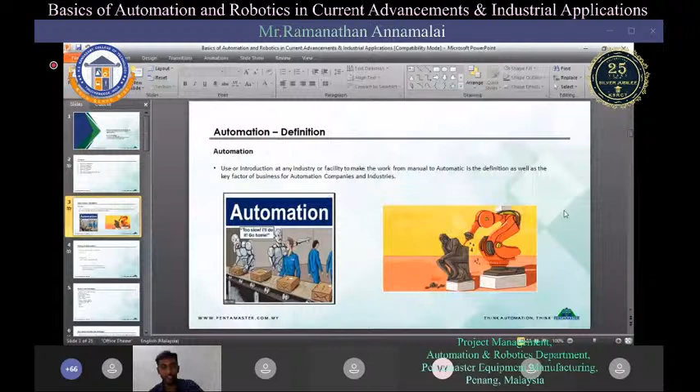It will be interesting because the first ever automated invention was a clock. Previously, in medieval times, we used shadows to determine the time, and the first ever equipment made was actually a clock. It was followed by different inventions like windmills, steam engines, etc. Currently, in this generation, it's very much advanced and used to test sensors, microchips, and also assembly of servers, etc.

So in that line, our company is making solutions - every automated solution that a consignee or customer requires us to do.

So in this session we'll be going through detail, step by step. Any doubt, you can note down and ask me at the end of the session, I'll be free to answer any of your questions. One more thing I'd like to emphasize is that our company is specialized in automation, and robotics is just a tool we are using.

My job view and job scope is something like I need to manage the engineers, so more of the technical data I might be lacking somewhere, but I'll give my best on whatever I know. If there's something you ask that I don't have the answer to currently, I will surely get advice from my engineer and get back to you.

And I think, so let's go to the next slide. For automation basics and principles, I've listed down everything from the start, and the process we'll be doing to build a machine. This is the second half of the process - the first half is something like you will receive documentation and everything, which I think will not interest you much.

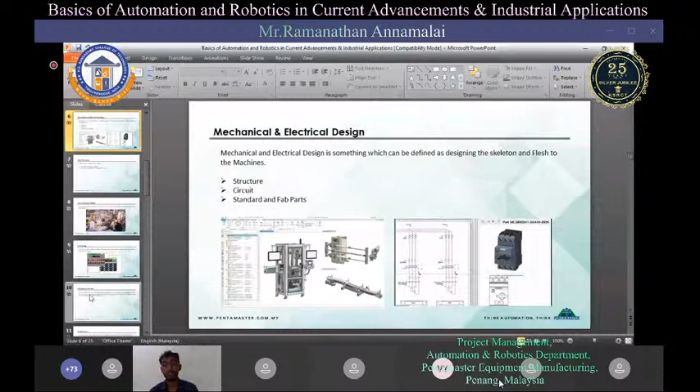Once they finish their mechanical design, they will move to the parts purchase. In our machine or solution, we need to use various amounts of parts - hundreds and thousands of parts we need to use. There are standard parts and fabrication parts.

Standard parts are long lead items which are already available in the market, like the robots and automation equipment used in the machine. Fabrication parts are something where we need to release a drawing and then a vendor would do it for you - you release a drawing and they will make the parts for you. This one you can receive in very little time. The standard parts which are already in the market will take more time to reach you, since they are long lead items.

Once you finish your design, you send your package to the customer, and the consignee will make sure that everything is satisfied, every condition is satisfied, and then they will give approval to proceed with the parts purchase. So next step - I think you're following up with me.

The first step is the mechanical design and the electrical design for the circuit, and then you go into parts purchase. After the parts purchase, we will start the assembly and wiring. Once you receive all the parts, you will start to assemble the structures and also the parts of the machine which is required to be done.

This will take around 3 to 4 weeks to assemble the machine and do the wiring and equipment, because each and every part will be communicated through I/O systems. I/O is input and output - I give you a signal and then you acknowledge back. This is the principle we use in automation machines to communicate between different parts.

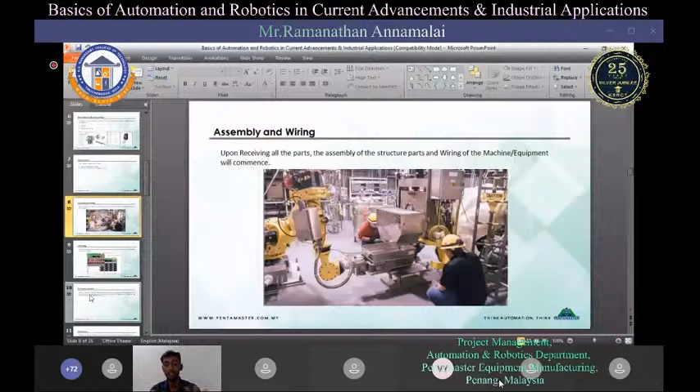Then the next step, you go to the I/O testing - that's input and output, as I said. Normally what we do, we have a system called PLC. The communication is such that all the mechanical and electrical parts will communicate to the PLC and then modify or execute the command that you are giving. So this I/O will be controlled by a PLC system, which I think in Mechatronics you also have a paper on PLC programming, if I'm not wrong.

So this PLC programming is like a code, and you will go through each and every step. You will write the code on how the machine should move and what exactly it should do. After writing the code, you will test the communication between the parts and the IO, checking whether you are receiving everything you need or not.

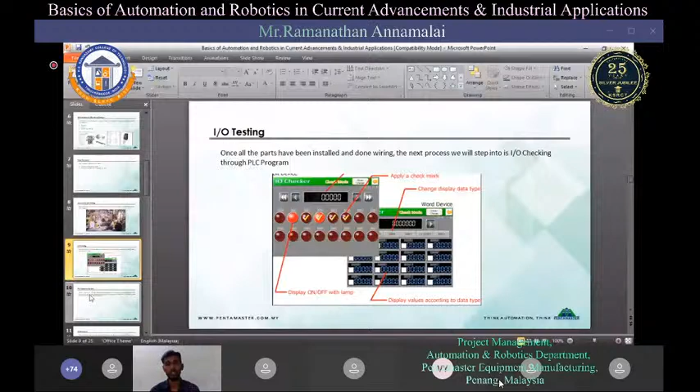After doing this IO testing, you will move to the dry run. Once you get all the communication of the machines and the values for whatever steps are required, to make sure your PLC is working correctly, you will run through a dry run. This means you will just let the machine run.

This dry run is to make sure the hydraulics and pneumatics of the machine are working properly. One basic thing about this machine is that whatever machine we are building is completely based on satisfying the customer's requirement for their product. Sometimes a customer might need us to assemble a product on a conveyor, or they might require us to test their product to make sure it's okay.

For example, if you have your phone, there are a lot of microchips inside it, but you don't know whether a chip is faulty or working correctly. That's where we come into action and make sure that this part is exactly working as required. We do a set of tests for the microchips to make sure they're working correctly, and only then it gets released to production.

So each and every customer product needs to be tested or assembled, and then the end product is given to the customer. This is why we are building automation systems.

Actually, you might ask me, if this is just assembling one product to another, why can't I just do it by hand? Why do I need automation?

The answer is, you can do all the assembly you want, but if the customer requires a product of 1 by 1 mm size to be attached into a 2 by 2 mm size part, you cannot ensure it is accurately placed or connected to the system. That's where we use high-accuracy robots and automation systems to make sure the accuracy is correct, and then we install the parts into the product.

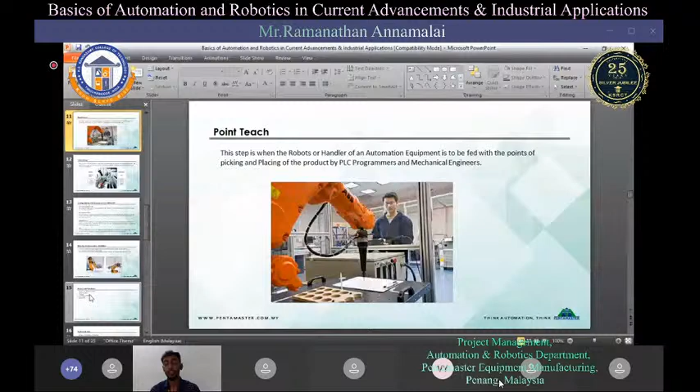So vision setup is something like a camera to make sure that your product is picked and placed properly. In the automation industry, around 93.7% of automation or equipment is actually based on the vision system's signal. If the vision system says this product has failed, it is failed. Or if you're placing with like a 0.1 mm tolerance or offset from the exact point, your product might fail.

That is where this vision system comes into the picture. This vision system is something like a camera which keeps on scanning, and it is given an algorithm by itself to make sure that our product is inside the line or inside the assembly we need to put.

So this vision setup is not like a normal camera we're using, like a DSLR or something we use to take pictures, for DP and everything. This is more like a normal small camera, but it is more expensive than our actual cameras because this can be fed with algorithms to make sure the product is pass or fail. It can decide by itself, with the algorithms we feed it, whether the product position is pass or fail. So this is where the vision system comes into play.

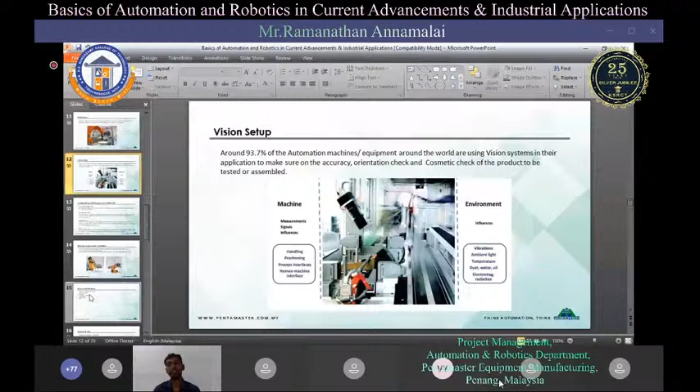Proceeding to the next step, which is the testing criteria. This testing criteria is only applicable when the customer requires us to test our product. If it is only assembly, we don't need to do all this testing criteria. But if our product is something we need to test before giving it to production, like a sensor or light sensor or something...

Normally in our iPhones or all phones currently, you can see the screen auto-brightening and then coming back to normal. These are all microchips and micro sensors used on the face of your phone, so it can detect the light outside in the environment and then reduce or increase the screen light as required. If we don't test this product, it will not do its job properly. Sometimes if the product is not tested properly, you put it inside your phone, and if you need light it will dim the brightness, or if you don't need light it will go very high brightness. Something like this might happen if your product is not tested properly.

I can't completely reveal the consignee or the product we are testing, but I can give you a clue: the sensor we are testing and the products we are assembling are for world's very large legendary companies — a fruit company and a search engine company. I think you should have guessed by now. These companies require very strict protocols to follow, and we need to pass their criteria, or else we will fail the buy-off, and then we will need to bear the loss that the company faces.

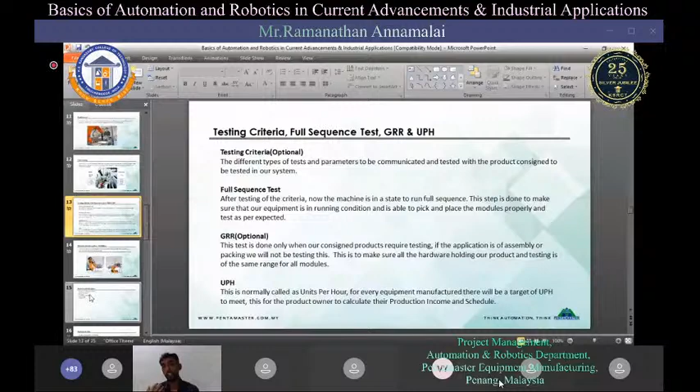And now we will go into something like the robots. Robots are the heart of your machine. Without this robot or the handler, you cannot pick the module or take in the customer's product. This is where robotics comes into play. To be simple, robots are something which can handle your product inside your given tolerance and accuracy, and it can perform without damaging your product.

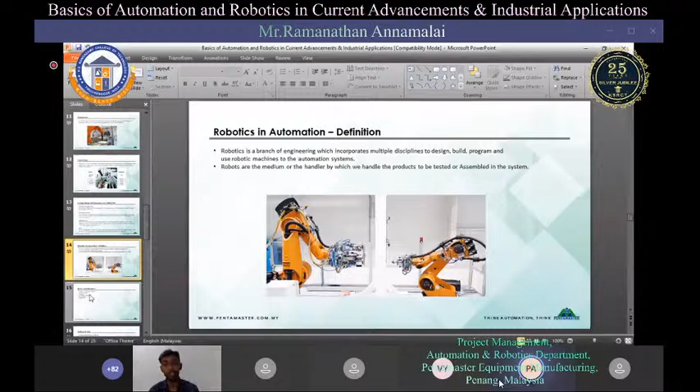So going through the basics and principles of robotics, I think first we will go through the design and calculation of payload.

Payload is something like, if you're going to lift up a product, you should make sure your robot can pick up and place it without any problem. If the robot is overweight and you're just going to pick up a pin, you're wasting your efforts and your resources. So you should determine the right payload for your robot which can pick and place in the right place accordingly. This design and calculation of payload is important because the robot is a standard part, but our customer's product will not be a standard part.

That is when they will be introducing it to the market. So we need to design an end of arm tool, EOAT, to hold the product using the standard robot. That's where the calculation of payload comes into place. Every robot needs to be calculated with the payload. Without calculation of payload, you're wasting your resources and your budget on the robot.

Normally the best robot can move up to 7 to 8 axis, but in automation basis, the most used robot is something like 6 axis. You can move in X, Y, and Z axis. Z is something like the height, and X and Y, like in a graph, X is horizontal and Y is vertical. The Z axis is the height difference between the product and the place you want to move it.

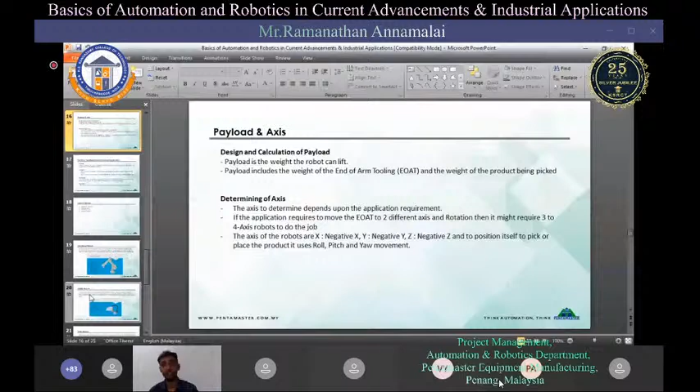After design and calculation of payload, you'll go through the same process we do in automation, which I've elaborated here separately for the robot. First, after designing and determining your payload, you will purchase a robot. Then for installation, you cannot just place the robot inside our machine, because the robot's weight will be very high and your machine needs to withstand that kind of weight.

So what we do is, if it's a ground mount, you will place a mount on the ground, and above that we will place the robot. Sometimes, mostly if we need more accuracy and speed, we will purchase a ceiling mount robot. A ceiling mount is something you can fix to the top of the machine and it will move from the top. For this kind of ceiling mount, you will need a ceiling mount fixture to hold the robot on the ceiling. And then the pointage is what I've said previously.

After you finish fixing the robot, you need to continue with the pointage. You need to pick up and place, and do your accuracy measurement and everything. After that, after your pointage is done, that's when you will start your application. You will check all the points, the placements, and the full sequence test.

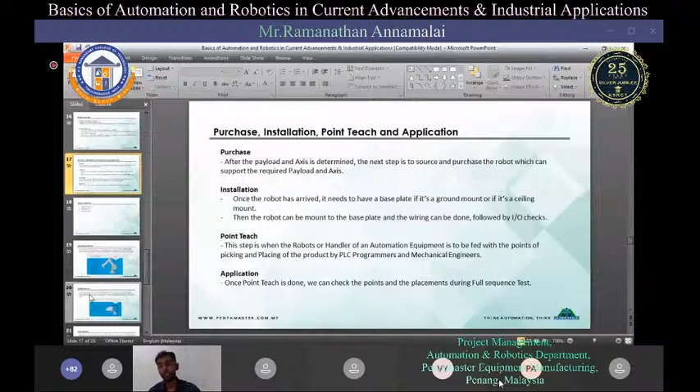All can be verified by dry running the machine. Now when I come to speak about robots, there are very different kinds of robots. They are majorly classified into 4 types of robots used in our application in the current industry, which I will go into, starting with the articulated robots. I think there's only a few slides left, and after that I can come to you for detailed explanation if you require. So the first type of robot is the articulated robot.

Articulated robots are the maximum amount of robots used in the automation industry. This is something like the 6-axis robot. It can be used for various applications which I've listed down there, such as pick and place, machine tending, assembly, welding, and packaging. Most of the applications in the automation industry can be done using articulated robots.

So articulated robots are mostly ceiling mounted, but if the product is too heavy, your ceiling mount cannot hold that much weight. That is where your ground mount robot will come into use. So this is the first type of robot, where you use only one hand, and then you move in the 6 axis. Now I think it's already 7 axis you can use in the market, but until my knowledge, what we've used in the machine, the maximum we've used is 6 axis only.

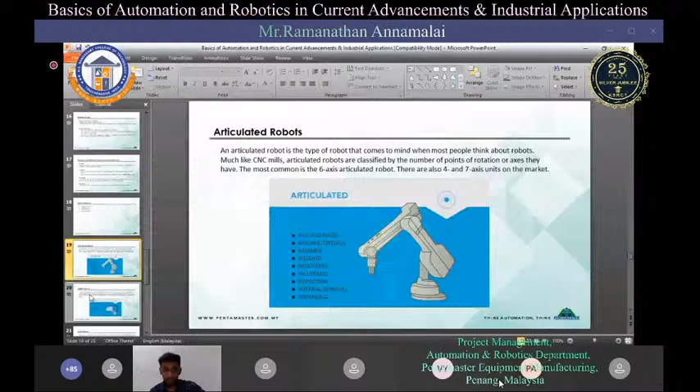And next you can use the SCARA robots. SCARA robots are something like a part of the articulated robot. It stands for Selective Compliance Articulated Robot Arm. It's a short version of the articulated robot. But why we use this is because it has more speed and more accuracy, since we use it to take very small parts. It has very low payload, and its movement, the RPM, will be very high when moving the SCARA robots. So the SCARA robots is something we use in our current generation to pick minute parts to do testing. We'll use the SCARA robots for that.

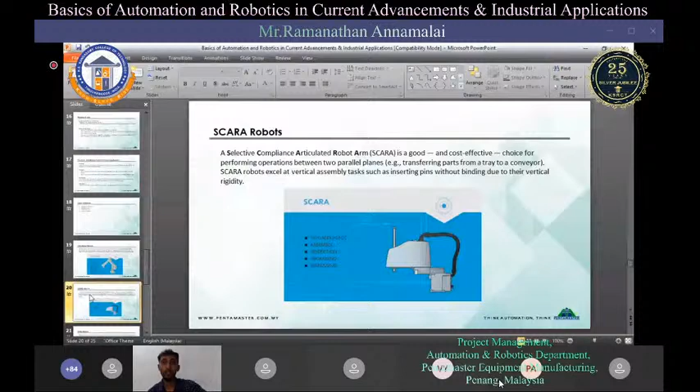And I think next is the Delta robots. Delta robots are something where you will not use only one hand or one end to pick up. You will be using like 3 or 4 hands to pick up so that your product is placed exactly in the right position. If you pick with only one hand, sometimes if the module or the product is bigger, you will not be able to place the product with the required accuracy. So that is where the Delta robots come into place.

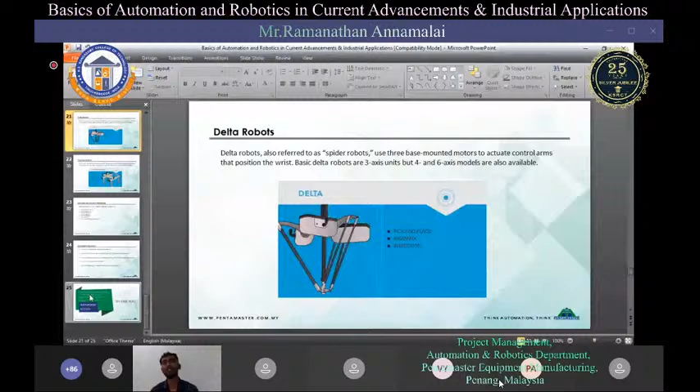Going to the next one is the Cartesian robots. Cartesian robots are something that isn't actually considered a robot. It's actually a semi-robot, something like that. So what you do is build a pathway for the robot. All it needs to move is you move X or Y or whatever direction you want. You just need to put this in. But these Cartesian robots are used very rarely because they can only be used for very specific applications. You cannot use this for universal applications like SCARA or articulated robots. So these Cartesian robots are something you will not see in our day-to-day life.

And these are the 4 types of robots that we actually use in the automation industry. And then coming to mechatronics' relation with industry.

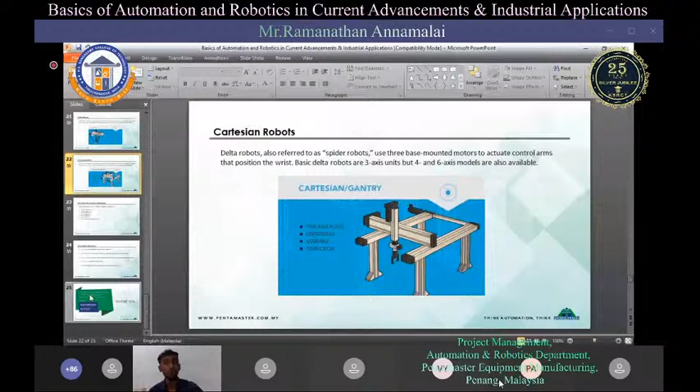So coming here, actually I studied material science and engineering in BE, but the specialization I did, and my final year project, were all done in nanotechnology. But actually, when I came here, in our company or in our system, there are a lot of mechatronics engineers involved in each and every scope. Project managers, I think a bit less, because they are more technical related persons where their expertise will be used. So mechatronics engineers are everywhere in our company, even in the designing department, the mechanical department, and electrical.

The maximum amount of mechatronics engineers our company hires is the PLC programmers and the HMI programmers. I think PLC programming is a bit very straightforward, and it's something like logics and circuits only.

If you learn PLC programming, it is really going to help you a lot in your future, because automation is actually coming as a big part of our daily life. Every single thing you see every day, 90% is automation. Your fan, your light, everything is automation.

I would also like to give you an interesting fact. I think most of you love bikes, as I do too, but there are certain companies which use automation in the application. For example, bikes like KTM. Most other bikes don't have this feature. You will have a radiator, a fan, and also a coolant oil, but this coolant will not go into your engine whenever your engine is getting heated. It has a required timing for when it should go and when it should not go. So that is where the automation is actually used in bikes also.

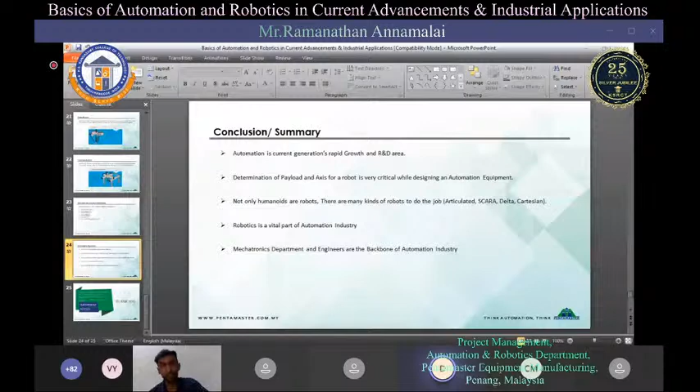Thank you for the elaborate explanation. All right, thank you. No problem.

Anything else? I expect more interaction from students. Anything else, using or whatever, you can just shoot the question. Because the more and more knowledge you have, the more it helps when facing an interview or wherever you're going into the world.